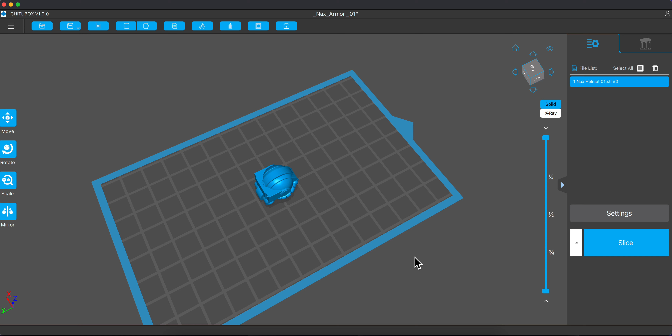So right now I'm going to teach you how to slice a file using the Chitubox.

As you can see, right now I have one file inside, and if we wanted to duplicate to have many files, which is the same one, I can just copy as I go along.

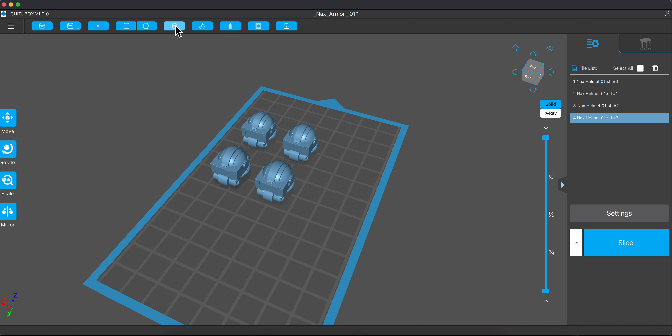And after I have done this, I can select the auto alignment to align it in the correct space. They will try to center as possible. Or you wanted to have the x-axis side or y-axis side, up to you. But normally I would suggest to go to the center.

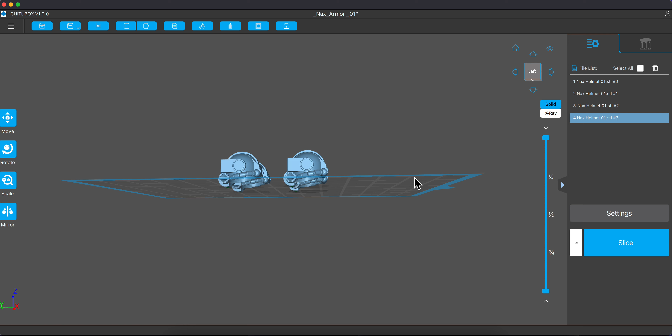And you can see in this file, definitely I will require to have support, or else I can't really have the file well and nice. So in this case, normally I will just

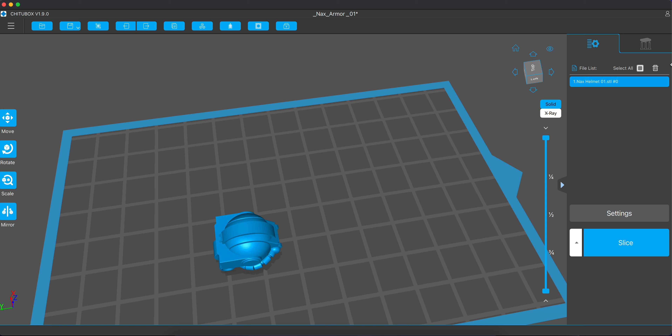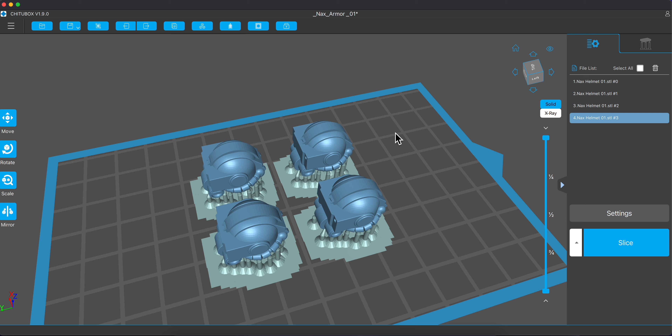select one file and add the support as I want to, after which then I will duplicate to have multiple of them. But before I do that, I would like to explain that if I'm going to have multiple prints, I will prefer to do it in this way, to have as many as I want to squeeze in the same bed. Why?

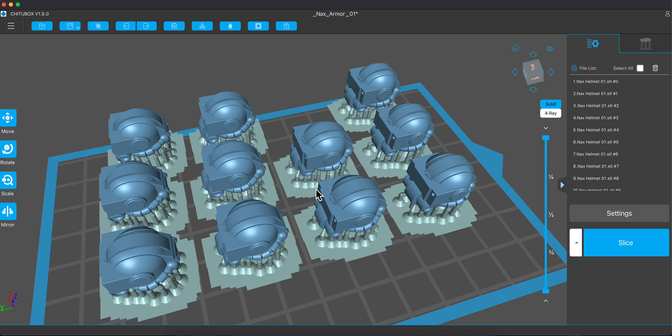Because if I'm going to slice one file, the timing is 1 hour. But if I duplicate and have multiple of them, the timing is going to be the same, but I can have as many parts as I want, as long as I can squeeze them in the same printing bed. It's just that the amount of resin they are going to use will change the value.

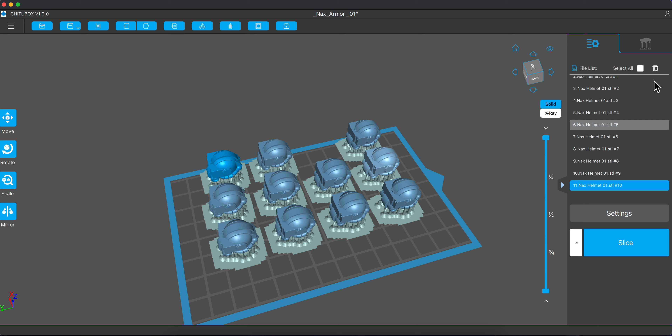If you wanted to have more, of course the more resin you are going to use, definitely, right? Okay, so right now, if I wanted to have two separate files, that means two files, they are not identical.

Right now this one is called helmet, and I'm going to have the armor. I will drag it in like this. You can see two different files.

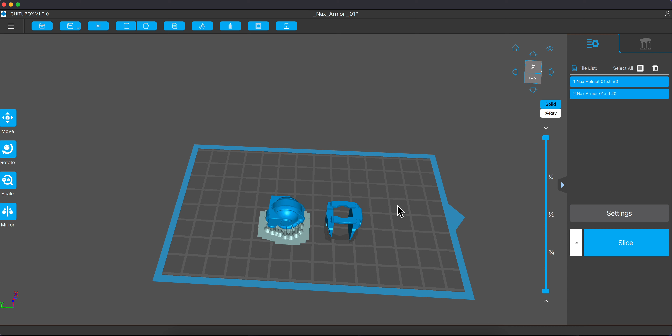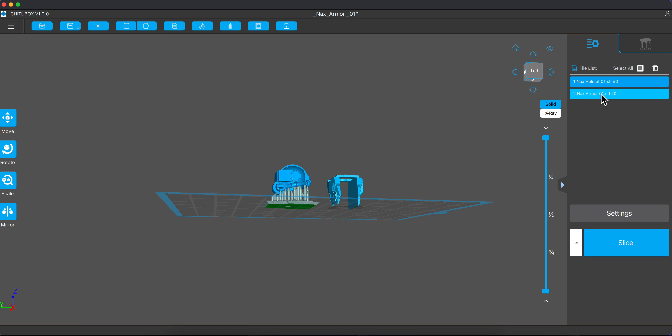And in Chitubox 1.9, there is a function which I love a lot, is that I can select different settings for two separate files and slice it together. In this case, you can see I have two files, and the first one I have already set the setting on the support. The second one I can set differently, but I can't select one of them.

I right now only can select both of them at the same time because the select all is being ticked. So I have to untick it in order to select individually.

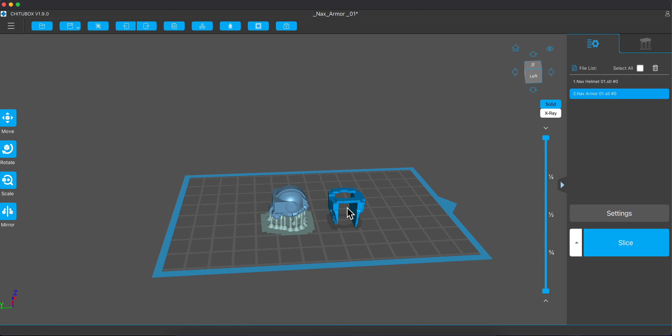Then after which, once I select the second one, I can go over here and give it a different setting, and add the supports. Then I can go back to the origin.

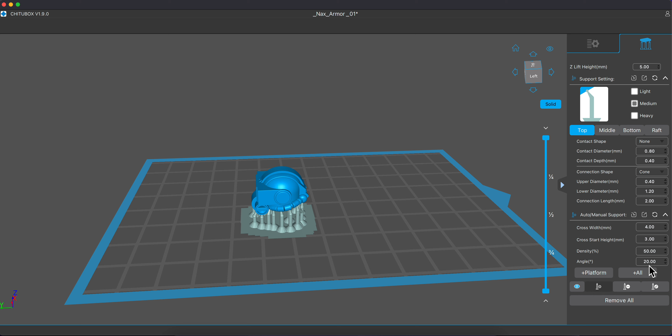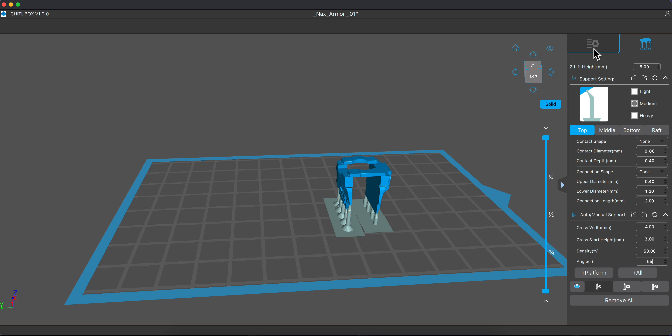What is the best angle for supports? The lesser the digit, the more support it will be. The more angle, the lesser support it will be. But for me, I would say that the best figure will be around 55 to 65, which I feel works for the parts I am printing, like this miniature figurine.

So once we are done here, we can slice it, so we can print two files together. We have this preview page that allows us to see how it's going to print, and there will be 384 layers.

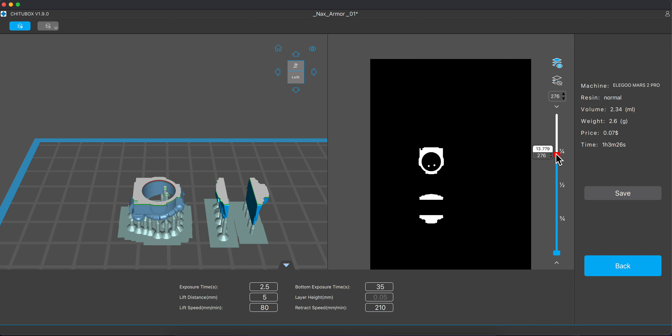So from the first layer, second layer, slowly it will go up, and the timing of the exposure for per layer. And we'll know that this one, the timing is 1 hour and 3 minutes.

So once it finishes, we will need to save the file into our USB, but right now I didn't insert any USB, so I just save it on my desktop.

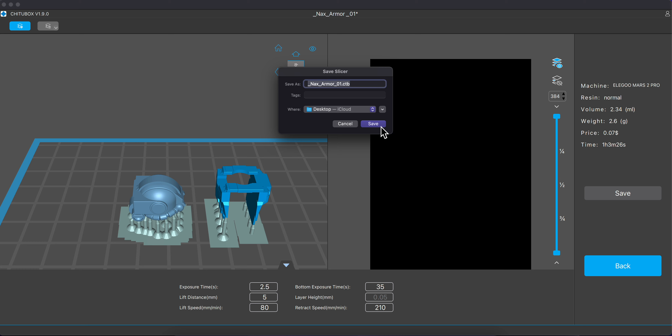Always remember, when you are going to save this file, you need to make sure the write file is successful, because if you never have it write successfully and you pull out the USB halfway through, you may only have half of the print. This is very important. All right, okay, that's all for now.